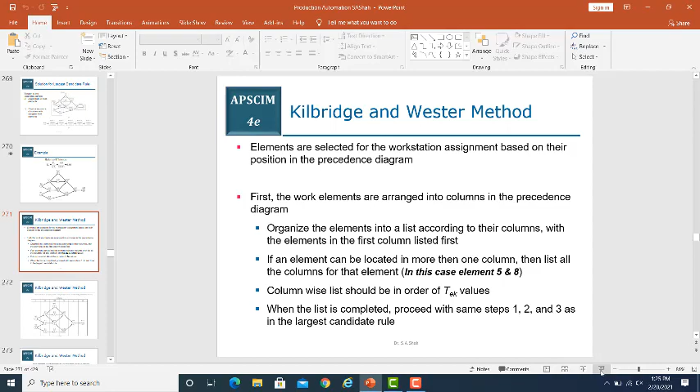These are the steps involved in the Kilbridge and Wester method. Here we select the elements for workstation assignment based on the position of the operations, or work elements, according to the precedence diagram. I will first read out the steps and then we will discuss them.

First, arrange the work elements into multiple columns within the precedence diagram. Initially, the independent elements which do not depend on any other processes are collected in the first column, then all elements which follow element 1 and element 2 reside in the second column, and similarly the followers of that column reside in column number 3, and so on. So the first step is the column-wise distribution of the work elements.

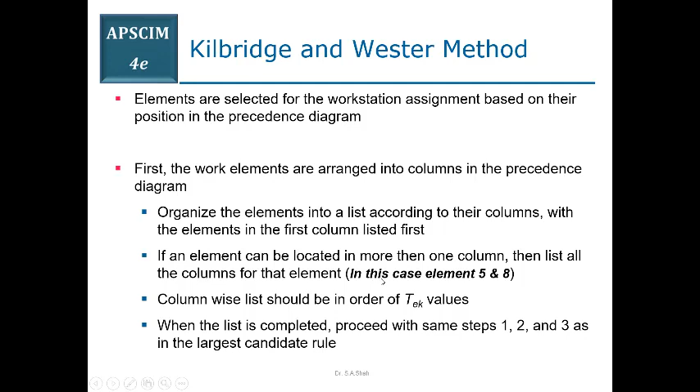So let us start. You have the precedence diagram. First you arrange it into columns, as I explained, and then you rearrange the same table according to that column-wise distribution.

In column number 1 we have two elements and the largest candidate is work element number 2. So I will write the second element on top, followed by element number 1. So my listing within the table of elements will be 2, 1.

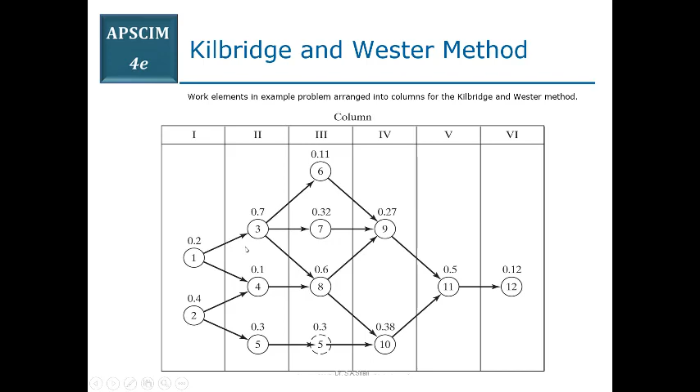So definitely it is the largest candidate, so this is the first feasible element that we can assign to the first workstation. Its processing time is 0.4 minutes और जो allowable time हमारे पास है वो 1 minute है. We can easily assign this task to the first workstation, and it also does not have any precedence requirement, so there is no issue. So आप station number 1 लिखेंगे and the first element that we can assign is 2, और यहाँ पे 0.4 है, तो total slot 0.4 हो जाएगा, and still we have 0.6 minutes left.

So again we will start from the top of the table and look for the second feasible element, and in this case work element number 1 is also a feasible element whose processing time is 0.2 minutes, and it does not have any predecessor, so we can assign this also. So the next operation that we can assign to the same station is work element number 1. Its processing time is 0.2, so in total we have 0.6 minutes, so 0.4 minute का time still it is left

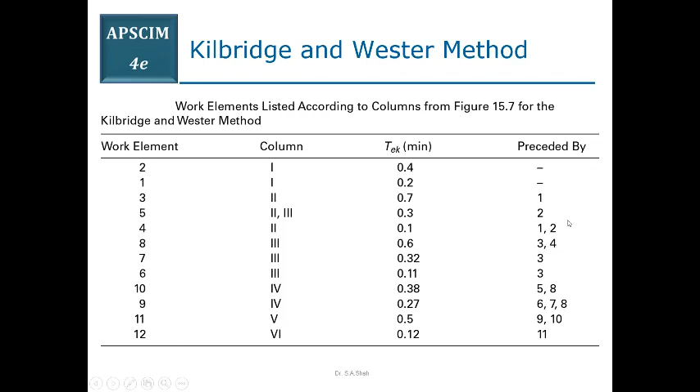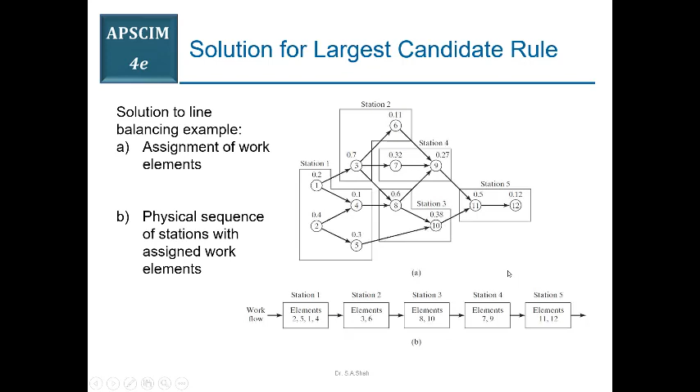And then the steps remain the same. You will have to start from the start of the table, look for the feasible element that can be assigned to station number 2, and so on. So this is the final distribution of the workload according to Kilbridge and Wester method. और इसका अगर आप ग्राफ देखें तो let me show you the graph of the previous result also.

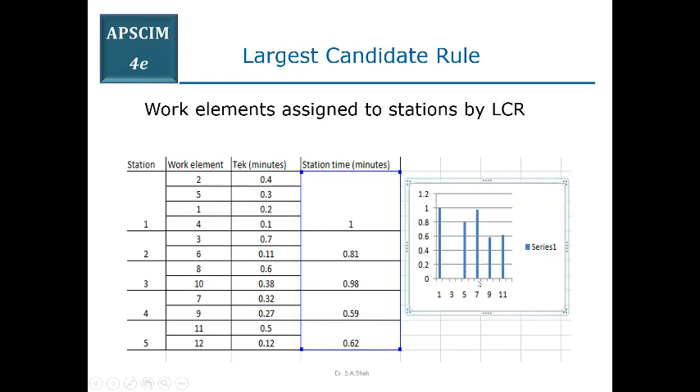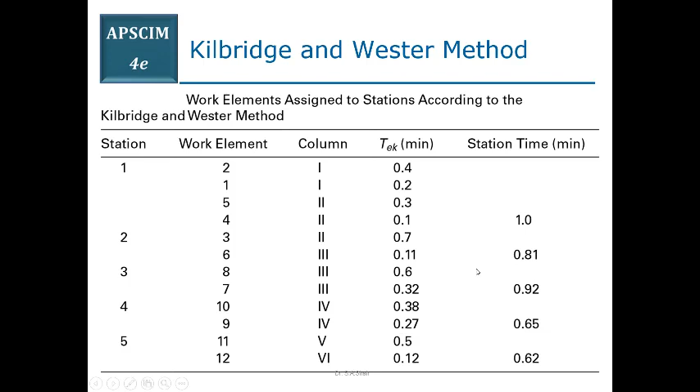सिमिलरली यहाँ पे भी अगर आप देखें तो this example is intentionally made in such a manner so that it will not give you a good result using any of the available methods. So this example is basically for your understanding. यहाँ पे अगर आप देखें तो we have 100% utilization of workstation number 1.

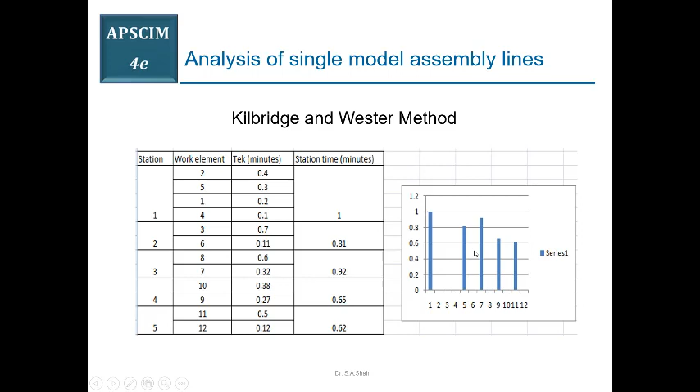The third method is the ranked positional weight method, and let me complete the slide so then we will discuss. If you compare all the three algorithms, largest candidate rule, Kilbridge and Wester method, or this one, rank positional weight method, RPW method इसे कहते हैं, ठीक है ना.

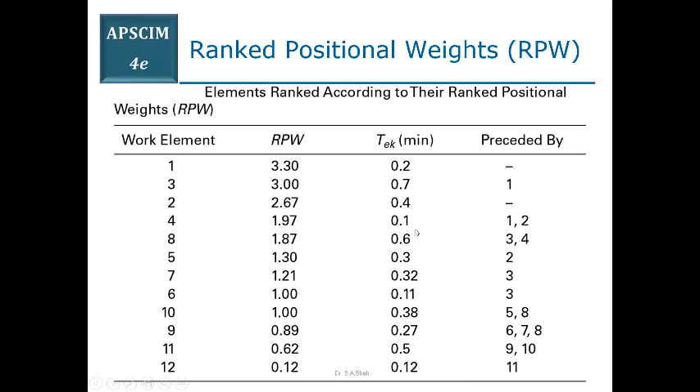constraint. But next constraint अगर आप देखें जो कि precedence constraints है, तो इसके predecessor जो है that is 1 and 2. 1 तो आपने assign कर दिया है लेकिन 2 अभी assign नहीं हुआ. So if operation 2 has not yet been assigned to any of the workstations, this means that you cannot start working on work element number 4. So we only have one feasible candidate and that at this time cannot be assigned to this workstation.

So eventually you will have to then add a second workstation to the system. So second आप ऐड कर लेंगे और उसको फिर आप assign करेंगे workload in the same manner and finally you will get some distribution of the workloads to different workstations. So इस केस में भी अगर आप देखें तो in total हमारे पास 5 workstations आ रहे हैं.

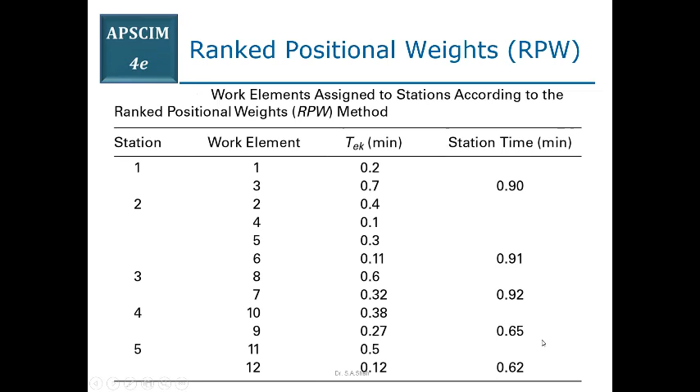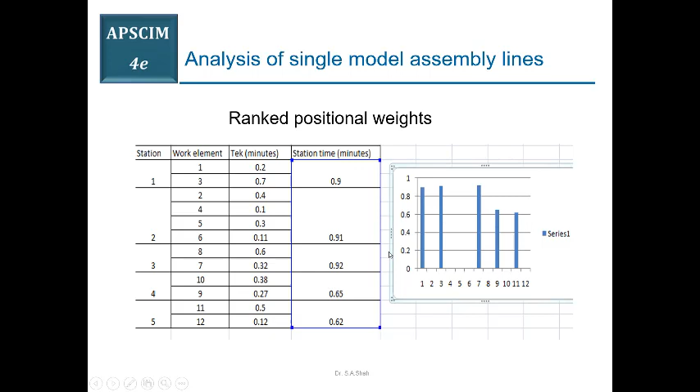So that's it. This is the Excel graphical representation of the utilization of the workstations, and this is comparison of all the three methodologies through which you can find the practical solution of this particular assembly system. So इस तीनों को अगर आप कंपेयर करते हैं तो among them the RPW method is a method which has given you a little bit uniform distribution to the workloads. Otherwise, none of these solutions you can say that they are the best one.

So it is not the only method that you can use to level off these distributions and to increase the performance of the system.

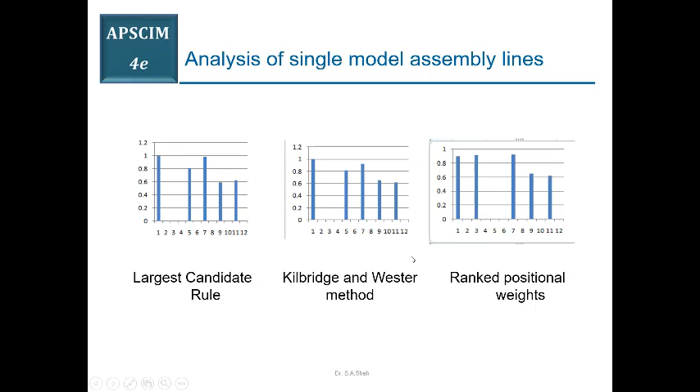So overall, if we conclude or if we summarize this line balancing algorithm, you will have to determine the maximum output for any system.